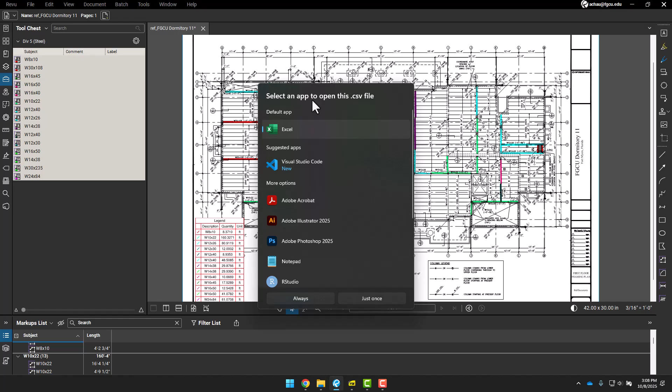After that, you click on the button here, summary, click on CSV summary, and then click OK to export that to Excel. Okay. Alright, after I export this one into Excel, then we can calculate the weight of that.

For the unit length here, I don't really need this column, so I'm gonna delete that. And then I'm gonna click here, right click on that, click insert to insert a couple columns here. And then I want to delete this row as well. Here I'm gonna say the steel beam.

Alright, so now I will click on the steel beam column, select the whole steel beam column, and click on data, go to text to column. In text to column, you see delimited over here. You just keep that as default, click next. Okay, so now we need to break the second number in this name over here into another column.

So you can click on this box, other, and then type the value that you want to use as a divider to divide the column here into two smaller columns. So I want to break that right at the X letter here, so I will just type X. If you have capital X, then you type capital X over here. Okay. So then click next, finish.

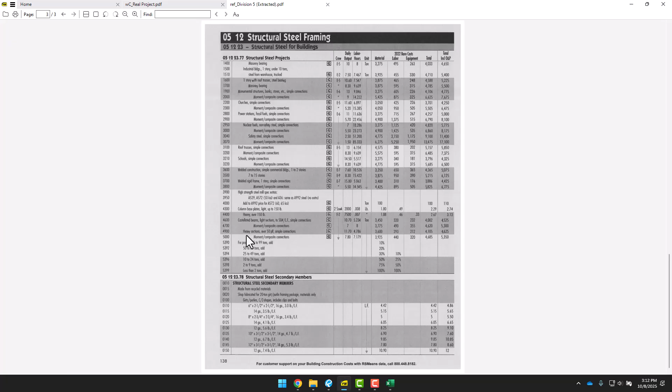So go back to the file you have and open the RSMeans. So we have RSMeans right here. And the MasterFormat, because this problem, I say here this problem is a dorm. And because it's a dorm, you see school over here, simple connection. So we're gonna try to find the MasterFormat code. So let's see.

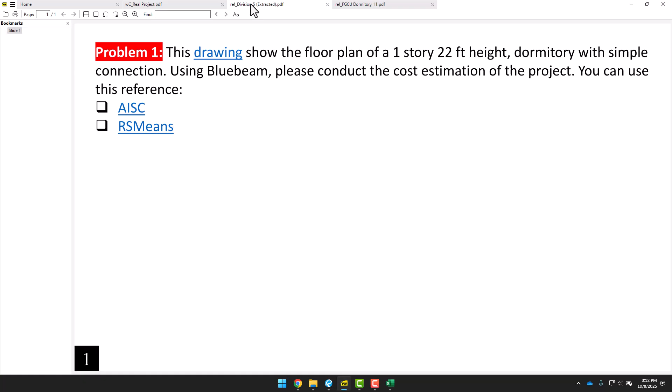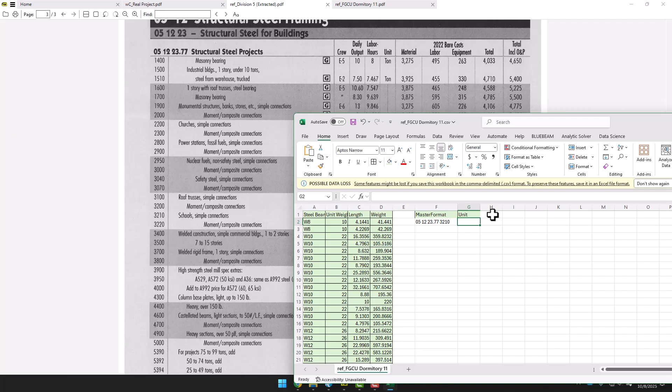Alright, right here. So the MasterFormat code of that will be 05 12 23.77, and this one is school, so 3210, right? And I would call this one MasterFormat. Alright, and the unit of that is ton. This one is ton, right?

So I'm going to type ton, and the quantity that we came up with is this value, so I would just type equal directly to this value. Okay, and then we have the unit cost. The unit cost is the one that we find in the RSMeans. The unit cost is 3796. Okay, so the total cost equals unit cost multiplied by quantity as always.

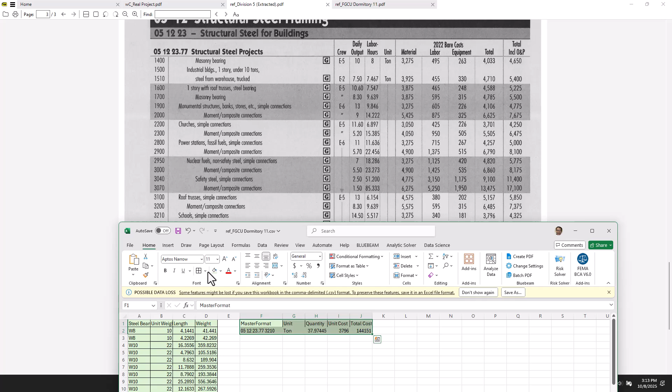Okay, and then format that one a little bit, and now you have the cost of the beam for this project, right? So now I'm gonna pause the video, and in the next video we will continue to see how we can merge all of the files into one single PDF.